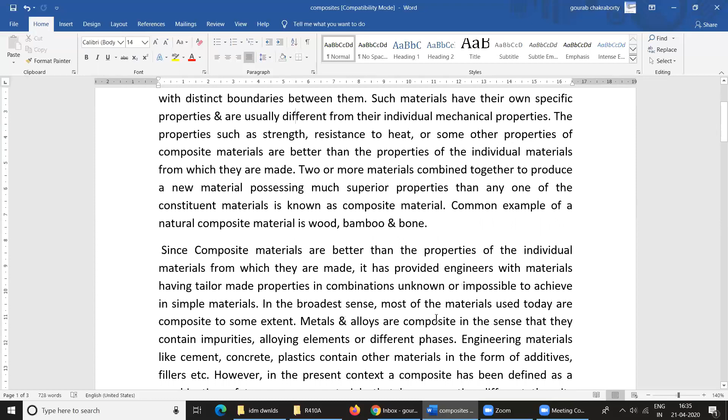Composite materials, as I have discussed already, are better than the individual materials from which they are made. Now, most of the composites were first made by nature itself, for instance bamboo, wood, skin, muscles, etc. The reason for the occurrence of composites in nature is perhaps that by means of judicious choice and distribution of two or more phases, we can optimize the properties, and optimization is the key to survival.

The structure of a composite material clearly shows the presence of two different materials. The base material, which is present in the larger amount, is called the matrix, and the other material is sometimes referred to as the reinforcing phase. It could be present either as three-dimensional particles, two-dimensional layers, or long fibers.

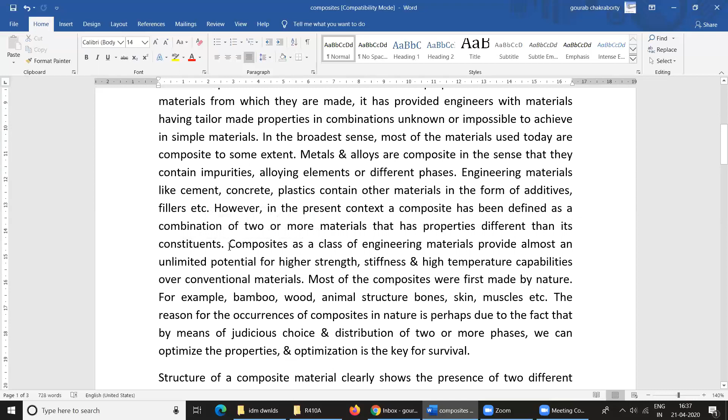Now, in the present context, composites have been defined as a combination of two or more materials that has properties different than its constituents, as I discussed earlier. Of the two materials, one is called the matrix and the other the reinforcing material, and with the help of those two materials a composite is formed which has better properties than these two.

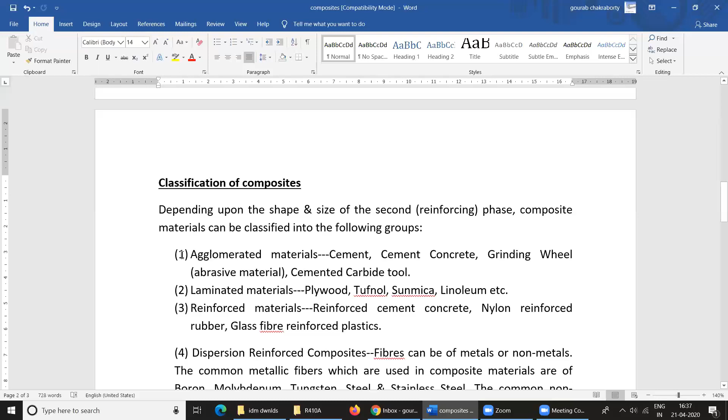Now, as per the classification of composites, depending upon the size and shape of the second or reinforcing phase, composite materials can be classified into the following groups: agglomerated materials, such as cement and concrete; laminated materials, such as plywood and sunmica; reinforced materials, such as reinforced cement concrete and nylon reinforced rubber; or dispersion reinforced composites, that is fibers in metals or non-metals. So these are the classified materials.

As for dispersion reinforced composites: when a soft and ductile metal matrix is strengthened by the uniform dispersion of hard phase particles, the resulting material is called a dispersion reinforced or strengthened composite. The second phase materials are generally oxides and carbides, which are insoluble and incoherent with the matrix. The diameter of the second phase particles varies from 0.01 to 1 micron, and they are dispersed in a volume concentration of 1 to 15 percent.

In dispersion composites, the matrix is the major load bearing constituent, and the fine dispersions act as a barrier to the motion of dislocations in the matrix. Alumina reinforced aluminum composites are obtained by pulverization of aluminum metal to powder. So this is a brief overview of dispersion reinforced composites.

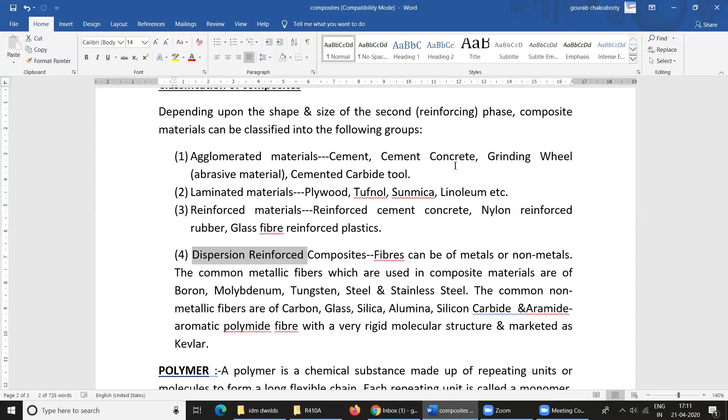Now, in the context of composites, I have already talked so much. Let us hear about some fiber reinforced plastics and glass fiber reinforced plastics. These are some important composites to be named.